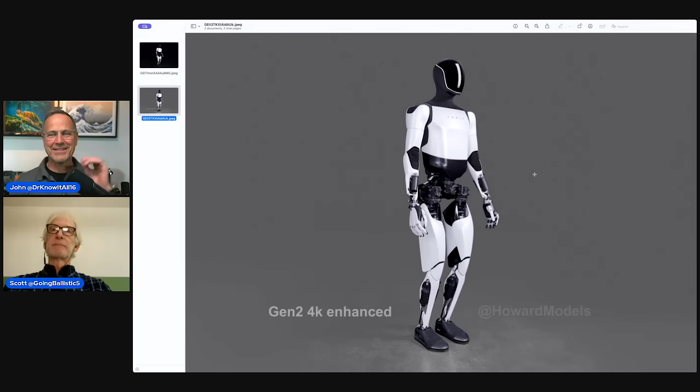So here is the original, but I think we actually want to look at Ed's, right? It gives much better contrast. Because you have like a kind of black on black, which is really hard to see, and he did a great job of enhancing. As I tried it, all my attempts were kind of lame at first. This one here, you really can see the edges of the bot a little bit better, things kind of pop out.

I'm thinking about that classic '90s thing: zoom and enhance, zoom and enhance. So we've got the enhance, let's try the zoom. You want to start at the top and work your way down, go from head to toe? Here we go, so here's the head, and I'll make it nice and big. That's about as big as I can go without overtaxing the screen.

Interestingly enough, we've actually seen more about Figure's face than we have about Tesla bots, because we've seen it do that little funky startup look or whatever that is. Figure does that, but it doesn't appear there's any sort of output display on here that we're aware of.

The two changes in the Gen 2: in the original one, the head did not move. In Gen 2, the head's able to move, it's able to nod up and down, it's able to turn left and right. So it has 2 degrees of freedom, they added 2 more actuators there. By my calculation, they probably added about an extra kilogram by adding those in. So for the 10 kilograms they lost, they added one back in right there.

So it means they really got rid of 11 kilograms in a way somewhere else. But as far as we know, there is no information displayed on the face. Doesn't mean it won't eventually, but you do have that nice crisp outline that goes around there.

James Douma has an interesting theory about that, because the question all along was, does the head really need to move? It doesn't seem like it needs to move. He thinks the only reason they put it in there is more or less for social integration, to make it a lot easier to communicate to the humans where it's looking, because we're just kind of used to that as a species, that we can read people's eyes and head movement very well.

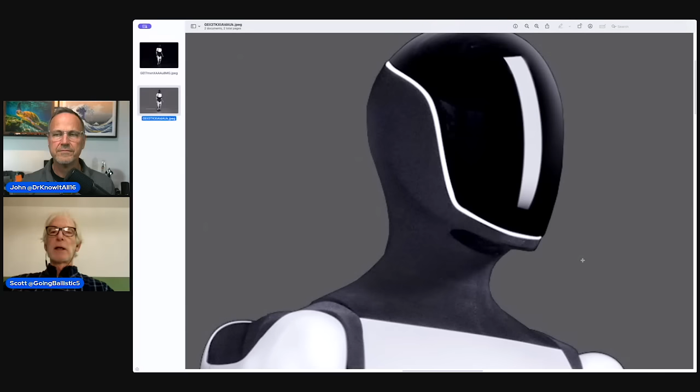Unfortunately, it doesn't tell us enough information about how that mechanism works. I suspect it's just two stacked actuators together. James had some theories that it could be like a ball and socket, where you could have these linear actuators to move it around, like C3PO's head. But I think that might be almost over-engineering.

It might be easier to stack them together because my theory has been that the roll of the wrist - when you look at that motor that's there, it only shows up in one place on the bot, and all the others have multiple purposes. And that's because it's such a low torque one. It seemed to me it was originally designed to also be able to do the neck, because the original design had the neck in there, and then they got rid of it.

So I'm saying, going off the original design, I think they decided to put it back in there. They're probably using the original design of two actuators - one to do this, and one to do the neck.

Yeah, and potentially even - because if the head doesn't really have an awful lot of stuff aside from sensors in it, it wouldn't be that much weight, so it might be able to get away with just a really small actuator. And it could be they came up with even another actuator for that, that is really low torque.

Well, it's a low torque one, still has to do a little bit if you're carrying a load versus what's there. So we'll see. But if they're using that one, that's why I'd guess, because those were about half a kilogram, the size of those actuators. And assuming they've stripped it down a little bit, maybe it's a little bit less than half a kilogram. But by the time you put it on there, you've added about a kilogram.

But at the same time, they had some structure there before to hold the neck together that's now been replaced with something else. So I'm not sure what the trade-off is. I'm guessing about a kilogram was added.

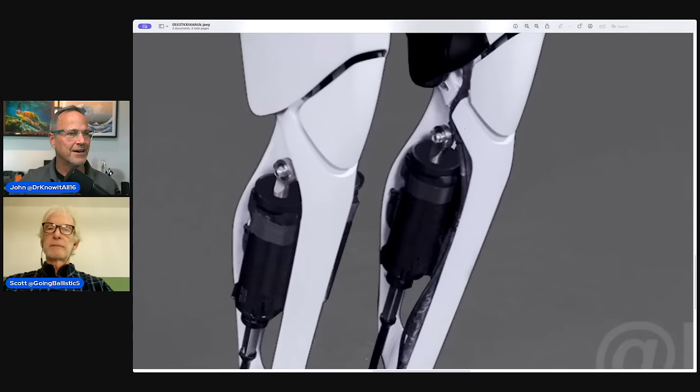You have a kind of roll axis on the lower arm as well as in the upper arm, and you can see where the two parts come together, and there's very little gap about there. So I kind of joke that there's no panel gaps - no one will be able to complain about that.

It seems really well engineered, really well finished when you kind of look at how well everything fits together in many different places.

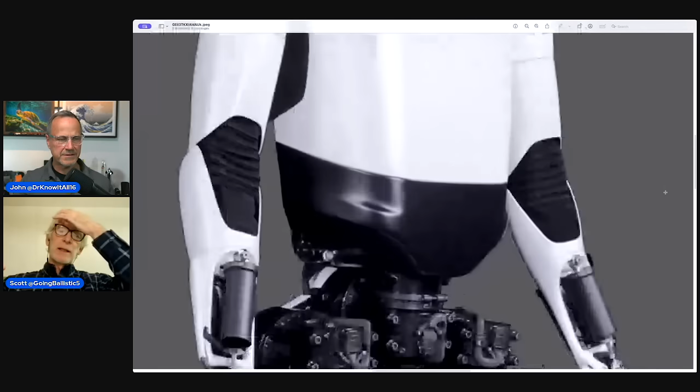Now, one thing I want to rely on your aesthetic eye for - when you zoom back and look at the whole bot holistically, do all the colors and everything match? Does it look like all the white elements are made out of the same material, or do you get the impression they might be slightly different materials? Is the color off a little bit on where you think the structural members are versus the covers?

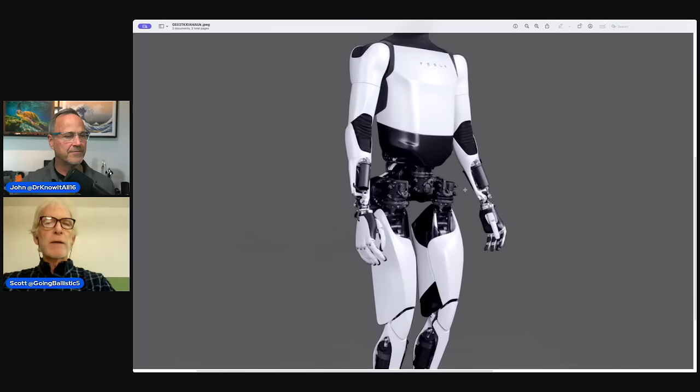The place that I would imagine, because clearly I think most of the rest of this is all cover, but the one place I noticed that has to be structural is the calf area and the lower arm. If you look at the wrist area, yeah, this area too. So those two are there, and when I looked at it really close, the color match is pretty darn good, but I get the feeling that they're slightly different materials. I don't know if it's just the lighting, the fact they're angled a little bit differently, but my gut tells me it's not the same material. They've done an exemplary job trying to get them to match.

I talked to my daughter, who is like the additive manufacturing expert in the family. Good to have one of those around.

The first impression is, do the covers look like they are 3D printed, or could they be injection molded or something like that? The overall impression was that you can't really see any indications that it's 3D printed, because usually there's some sort of pattern or something you would notice. But again, this is only a 4K image; it's not really high resolution.

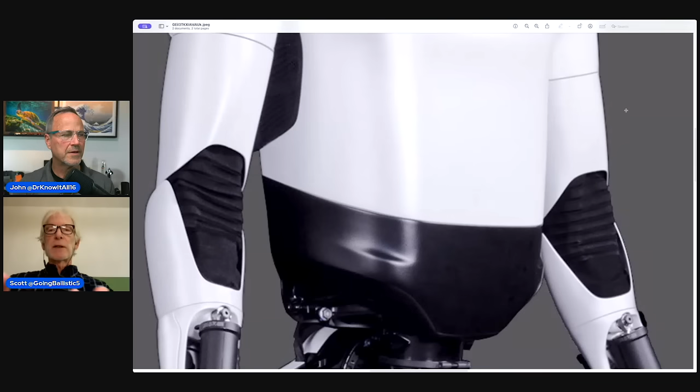Well, with a certain amount of post processing, you could also polish things and you wouldn't know. So straight out of a printer, you'd be able to tell, but there's probably been some post processing if it has been 3D printed. Even if it's been injection molding, there might be a little bit of post processing done to get rid of the flashing and everything else, because a lot of times you would be able to see that. So it's really hard to tell what material is there, or anything else, but it really looks good. There's no doubt about it.

While we're talking about materials, if you look at the difference between the white part and the black part here, the black part I would guess is some sort of aluminum or something, because it looks like it's powder coated. You can see a little bit of rippling on the surface where the specular highlights are, that seem to indicate that's more of a metallic thing that's been powder coated, and it's not absolutely perfectly smooth. Whereas the top part, it just might be a trick of the light and the fact that it's white, but it looks more like plastic on the top part. So that would be my guess.

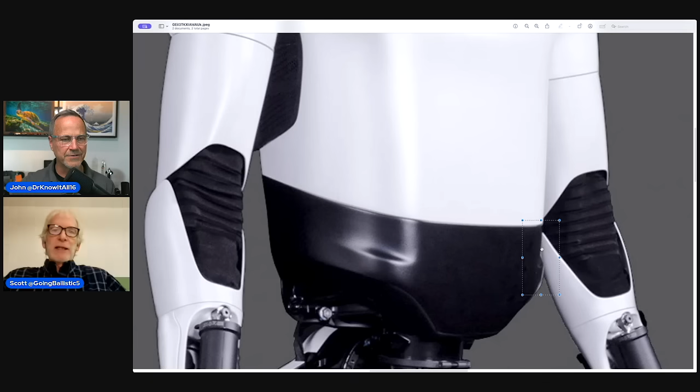So on the lower black part, you could see that kind of glossy white area in there, indicating there's a little bit of a notch or dimple in there. At first I was trying to understand what that is because I was expecting it to be a very smooth surface. But when you look at the video, you notice in that lower section there, it's got these dimples on both sides, and you can see it here too. It has something to do with the structure or whatever is underneath - that's the reason for them to do that.

And unfortunately, the waist area, because everything is so black and so dark, it's really, really hard to be able to make out too much of what's going on there. We'll try our best as we go along.

But again, if you look at the lower arm, if we kind of just zoom in on that area first as we go down the arm - I want to touch on this too. My theory here is that you need some sort of an anchor point for these actuators to mount to and grip onto, to move the upper body, which is pretty large and massive overall because it's got the batteries and all the computers. So I would imagine they've built something structurally into it that's essentially just a little handle for it to grab and hold onto as it's turning.

So underneath there's a structure where the actuator that's going to make the torso spin, or rotate along the spine - because you've got one that makes it go left and right, and the one that allows it to rotate - that's the main actuator that is then being bolted directly onto that. So that is where the torso structure is going to be, and then of course in there you've got that cavity that's going to be filled primarily with batteries. At this point, we think it's still 2170s because that's what it was in Gen 1, but the cavity looks to be a little bit bigger. So who knows - either they're putting more batteries in there or they could have changed the style of battery.

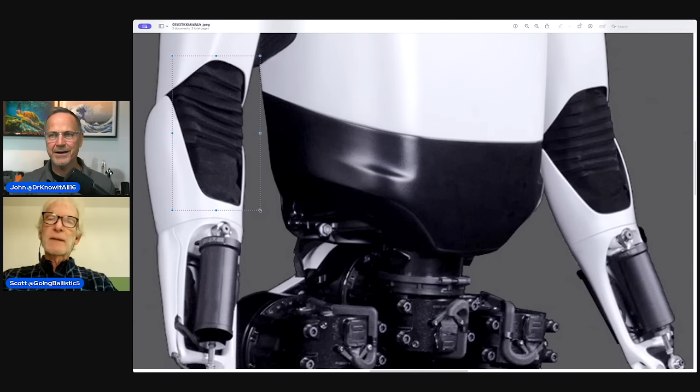Show this - it's extended down the arm much further than you would have expected. Yes, because there doesn't seem like there's any mechanism there.

So when I was looking at the elbow before, at first I thought, wait a minute, does the drive mechanism at the elbow kind of go through there? And when I reviewed it, no, it's actually in the back of the elbow. The part that kind of pokes out is in the back, and that's where the lever arm and everything comes down. So you'd expect it, and there is some protection in the back, and there is also probably some sort of black cover.

We can't see it in this photograph, unfortunately, but the pleated section there is much bigger and far more open, and I'm not sure why. The only explanation might be perhaps some of the cabling is coming through there.

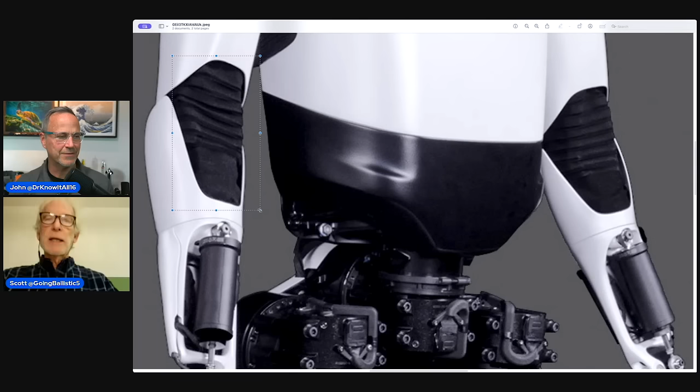The one thing we didn't look at, because we couldn't see it up on the shoulder, you don't see any of the cabling or harnessing or anything. It's really so tight, little cabling visible. It's beautiful, like they've fit most of it. You really have to go out of your way to kind of find it, and it's not until we get down to the wrist that the cables start to expose themselves. The first real cable you can see is right there, at that area.

Now, the thing we got to remember, what's going on that lower arm is you do have the wrist roll, which is going to be not quite plus or minus 180, but a substantial amount of movement, which means the cable that you're having through there is going to have to deal with the fact that it's going back and forth quite a bit. So you're going to have some excess cable it's going to have to wrap and kind of unwrap, and that might be the reason - they just don't want it to be constrained in there, so they have that open fabric area just to take the tension off the cable.

It may be as simple an explanation as that. It could also be that you reduce a little bit of mass, but then again, those are plastic covers, so I don't think there's a whole lot of mass there in the first place.

Someone else has said it could also possibly be to make sure you can get rid of any excess heat, because there are some servos up there. They're going to be generating some heat, so you might want to have a little bit of airflow or something like that. So there are many reasons, obviously, for doing that.

Those are just my guesses. But then when you get to that lower arm, that's where I think the material must be some sort of very strong, I would assume, metallic material, because you've got some loading going on there. You have the servos that have to be mounted - could you come up with a plastic of some sort? You could clearly 3D print that because it's a rather intricate shape, but you've got a couple of places that you have to pin the servos on there, and those are going to be places where you're going to have a lot of repetitive stress over time.

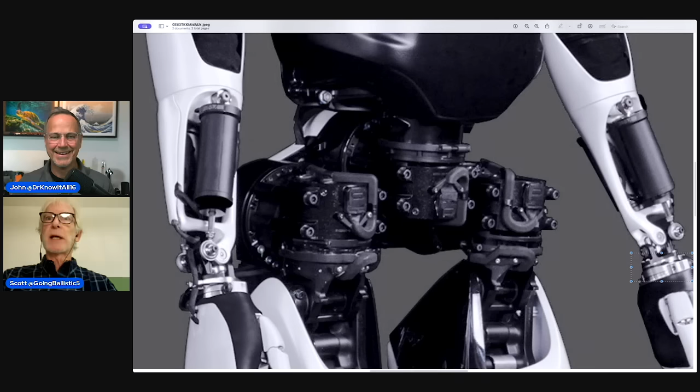Maybe it's just an aesthetic thing, it blends. It would look weird to have it go from white to suddenly metallic silver. But to me that sounds like an optimization - at this point are you really caring about the polish this thing has? This whole design, everything here is so polished, it feels very done, like they're ready for production versus something else. Or maybe they just wanted to see what it's going to look like, and I'm reading too much into it.

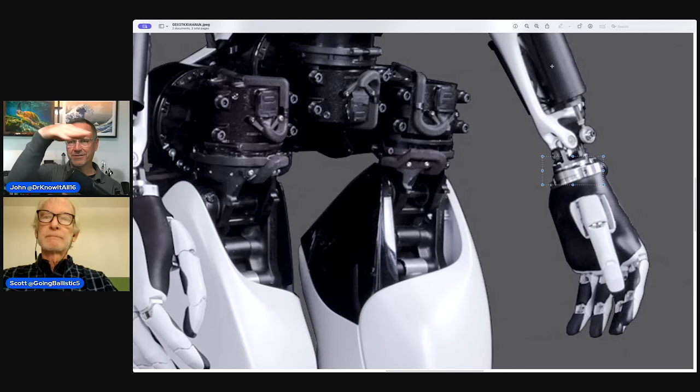So while we're talking about this, clearly we have two linear actuators on the side that allow the wrist to go up and down and also yaw back and forth. And then the wrist itself looks like it's got the rotational capability built in somewhere around here.

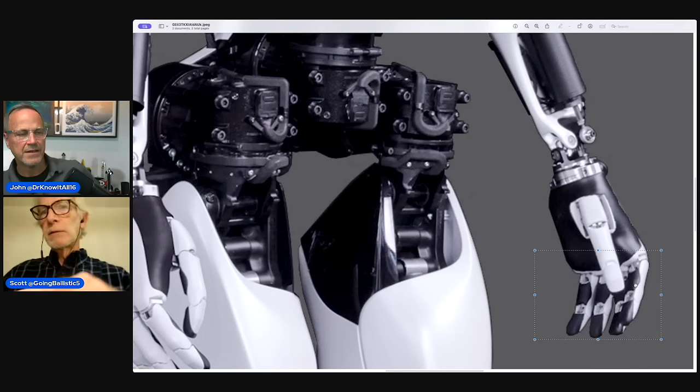And then of course we've got the fingers. As opposed to figure one that has three joints in the fingers, this clearly has two. It's got the finger pads, and then the knuckles - if you go to the left side, what would be the right hand, you can see the knuckles a little better. You can see the fingers only have two knuckles, and the knuckles where the fingers attach to the palm are offset. They're maintaining that offset to get a simulated arc of the fingers, because the fingers are all the same length - they're not making them different lengths because of different parts, different SKUs. So the best thing is to keep your part count down, make them all the same, but they mounted them a little different to get that arc.

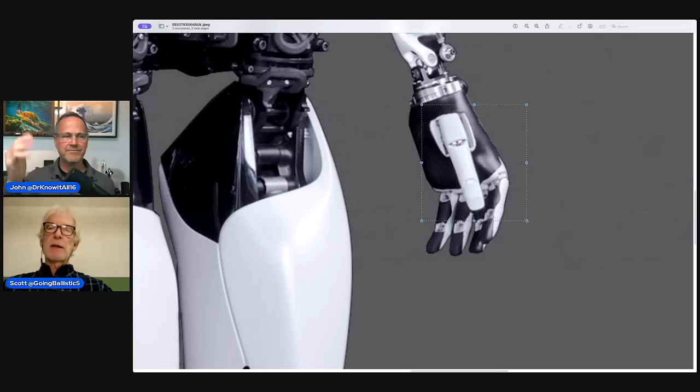A lot of people were wondering about the motion of the thumb, where there was a joint there. Yes, there is a joint, and the thumb is able to move in two directions - you can see that movement here, and movement up and down. It's designed to have two degrees of freedom there, whereas the fingers just have a single degree of freedom to clasp and open. But the thumb needs to be able to make that movement, otherwise they wouldn't have been able to pick up that egg. Maybe even the same thing with a t-shirt - that's the kind of dexterity you get from the thumb. And really, that's what separates us from other animals, the fact that we have an opposing thumb.

Just a small note from my animation background - they've got the resting position with the fingers slightly closed, which is much more natural. If it was looking perfectly straight, it would look like a robot. The fact that it has relaxed hands, not perfectly straight up, makes it look more natural as it's resting. So it's pretty deep into the design process when they're considering these kinds of things.

And of course, don't forget that we also have pressure sensors in here, which we discussed in yesterday's video. If you go to the other hand, you can see those pressure sensors a little bit better, so we know they're on the tips.

We just don't know. We see some black areas on the middle of the fingers, and we just don't know if those are non-slip grip or if they are also their own set of pressure sensors.

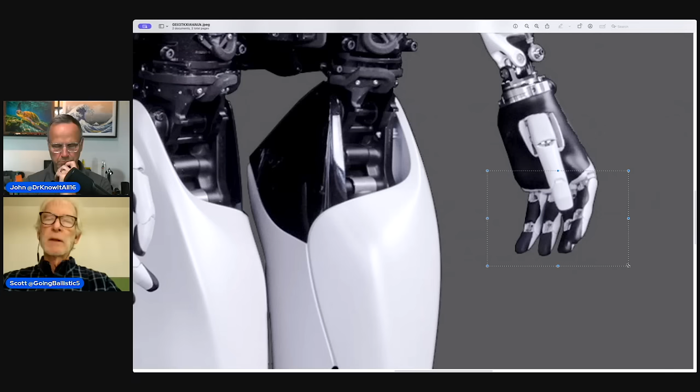The fact that they have sensors there means you'd need wiring to go along with them, through the fingers and out through the wrist. Looking at the wrist, the wiring going through there is very thin, whereas before it seemed very bulky. So they've done a very good job. It's still a little bit exposed, but it's not that bad, almost like it's not there.

This is where we can primarily see wiring in the body, coming out of the wrist, because routing it through the human wrist would be a complete disaster - it's just a whole bunch of little tiny bones. So in terms of design, it's better to route the cabling outside, although it's not the most aesthetic choice. Even the human body had to do that - we're jointed, and things have to go through there. You've got a really weird joint at the wrist, and of course your artery is exposed there too.

Normally arteries in the human body are deep internal, so if you get a cut you don't bleed to death. But there's only a few places the artery comes up to the surface, and one of them is around the wrist, because that's the only way nature's figured out to get the artery out to the hands - you just can't route it through the center. That's the same kind of problem here with the wiring. That's the best place to do it, because you won't kink it so much, and it won't get in the way since it's not right where the joint is.

In all robotic systems, figuring out how to route the wiring is a challenge. For end of arm tooling, a lot of it is just exposed. Paint robots have come up with a special hollow wrist that allows them to run the paint services and everything out to the gun internally, which is a remarkable design. But still, that wrist design has to be offset rather than having everything rotate around one place, because they don't want to kink the hoses going through there. You still have to make sure your radius of curvature isn't too small. It's always a challenge, and it's not bad what they've been able to come up with.

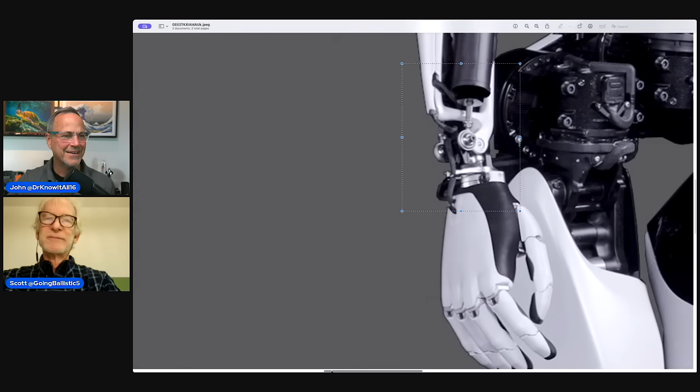But this, even though it's black, it's really cool how much we can see here. We have to thank Ed for that, because he was able to highlight it a little better so we can see that contrast. Before, I had no idea - it was like looking into the inky blackness and seeing absolutely nothing.

But the one thing we could see is these little guys - these look like standard Allen wrench bolts. It looks like it's nothing special right there. And it shouldn't be anything special, it should be something that's very easy to put together. So we can see how they're bolted together.

It's basically the same two motors just configured differently, two of them for the legs, and two of them are for the torso. Let me back off one little bit here.

So the torso, this is the one that's going to yaw it, I guess. There's going to be roll on the top, and there's going to be the bend back and forth. So we've got two different motions there.

Now the thing to point out is the torso in the Tesla bot is not able to lean forward. There's only 2 degrees of freedom there. The main movement is it can roll directly vertically along the spine, and it can go back and forth a little bit left and right. It cannot lean forward.

The leaning forward is actually done through the hips, through an axis that's much lower, below the pelvis, where the hip joint is, doing what I think is called flexion, like when you're kicking your leg. It comes there because it's a redundancy, you don't really need it.

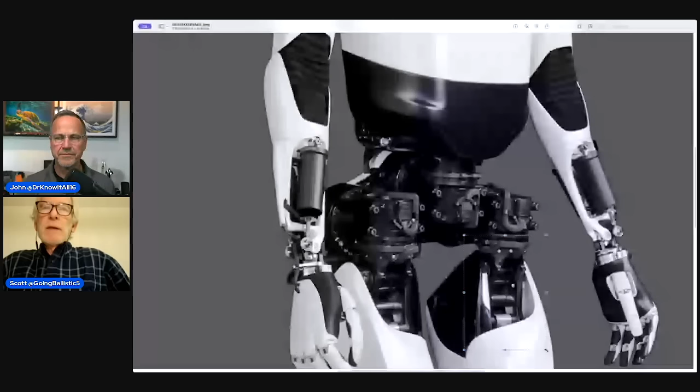Now the Figure bot, they came up with a really interesting design for the torso where they have 3 degrees of freedom. So they are actually able to lean forward through the torso, giving them a bit more redundancy, which means it might be easier for them to get in and out of a vehicle if they ever needed to. It's just a slight difference there.

But the main reason the Tesla bot doesn't do that is to reduce the actuator count, it's one less actuator. The other thing is you have that same pattern of two motors bolted together, and they want to do it in three places. In other words, they were reusing that pattern rather than coming up with yet another unique pattern somewhere. So that's kind of clever and nice about the design decision.

It's like, we don't really need to lean forward because we can accomplish it another way. You lose maybe a little bit of flexibility, like being able to access things if you wanted to literally sit in the Cybertruck.

But the big change we can see here from the Gen 1 is that the Gen 1 pelvic girdle had a plate in the front and in the back connected together. Now there's only the plate in the back. And that probably saves like a kilogram of material.

I think there's a big weight saving right there, as well as those servos look a lot more compact than they were to begin with. Way more compact.

Look at the pretty dressing of the cabling here. We've got these cables in sort of chaseways that you almost don't notice them. It looks like part of the design, but that's clearly the plug that plugs in, you can see where it goes. It's a beautiful cable design.

Whereas before there were a lot of wires around there. There were also some other control boxes sitting down that had blinking LEDs and everything. It looks like all that stuff they integrated together.

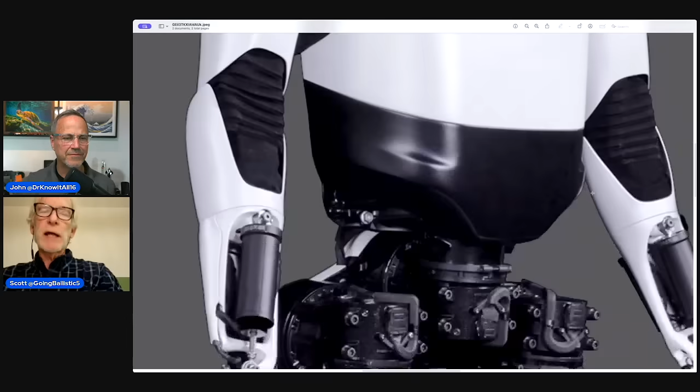That flopping means your body could decide it's acceptable to do that. Same with the knee - I don't need a rotary actuator there, I'll do it with a linear one because I only want the knee to go straight out and flex back at most 120 degrees.

Speaking of which, now we can see kind of like a knee pad or kneecap here. It's basically protecting what's going on there, and you can't quite see it, but it does open up when it moves.

This is also a little bit less human-friendly than the elbows, because we can see inside and you could imagine pinching your fingers. But this is probably fine for an industrial robot - it would not be fine for a domestic robot, but we're not talking about domestic robots yet.

So it can get away with that - you'll put something around it, like when you sprain your knee and get one of those ace bandages that kind of stretch over it. They could have socks and other stuff that would be able to go up there and cover and protect it, as well as maybe putting some material behind those knee pads for additional protection.

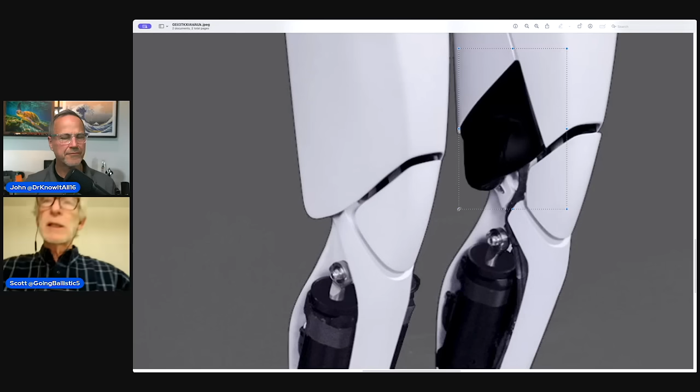Do you have an explanation for what this black part is? Is it just aesthetic, or what is that thing? It's kind of weird - it looks like some sort of potential cover going on down there, and it's only on the inside. It could be that they just want airflow, or because the cabling might be coming through there.

There's definitely cabling coming through - it's really hard to tell, but you can see the cabling coming up through here, more or less. So maybe it's flexible so that as the knee bends and the cabling comes in, it's able to flex a little and move out of the way so the cable doesn't get trapped. The length of the cable is going to change a little bit, but there's no rotation along those axes - it's really just the bend going on with the knee.

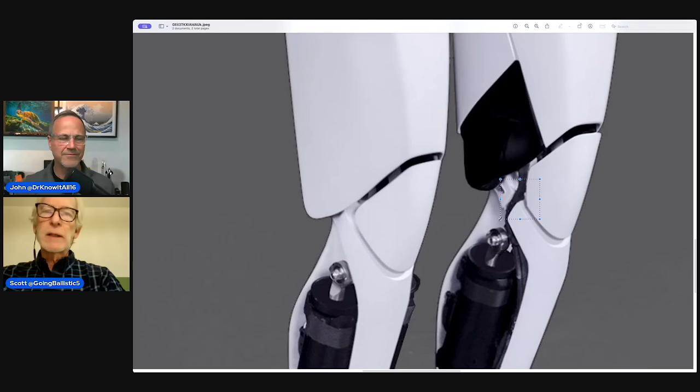Really very attractive what they've done here too - they've created a little channel for the cable to go through, and it goes through there, and it also separates out a little bit when it gets down to the foot. So if we bring it up there now, there's the ankle joint.

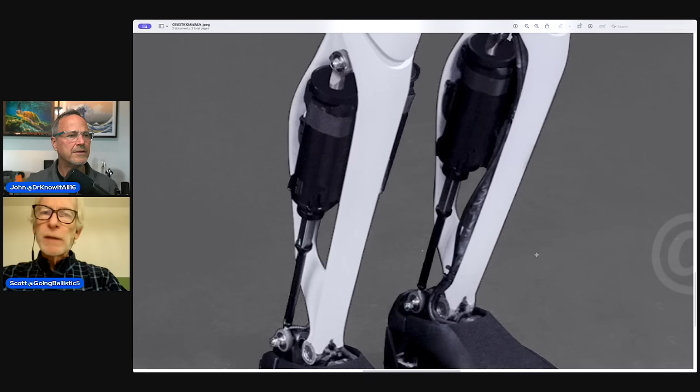If you zoom in on one of the feet, let's make sure we touch on this for anybody who doesn't know - this is very much the same as the wrist. We've got two of these linear actuators that can work in parallel or opposite each other to allow some degree of motion. This is the beauty that I've pointed out many times, but want to point out again - when it comes to the hand, you've got these three motions.

You've got the roll, which they have a dedicated motor for doing, that can almost give you 360 degrees of rotation. Then you've got this pitching motion of your hand, this flopping back and forth.

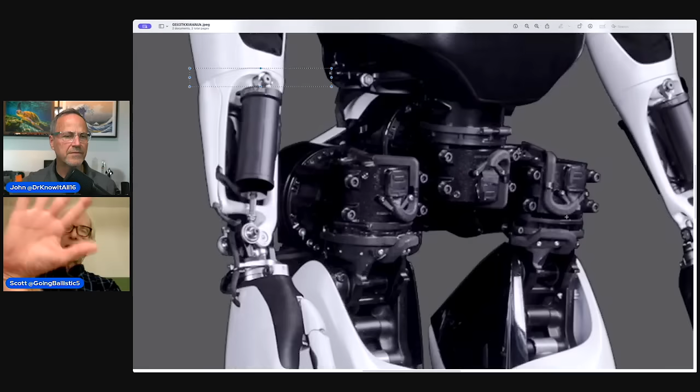Quite 180 degrees, but it's a very important motion. And then you get your yawing here, which is almost not there, but you have a little bit of movement to the left and to the right. You could decide to go ahead and put a motor on there, but that's a lot of overkill, and usually that's the last joint of movement.

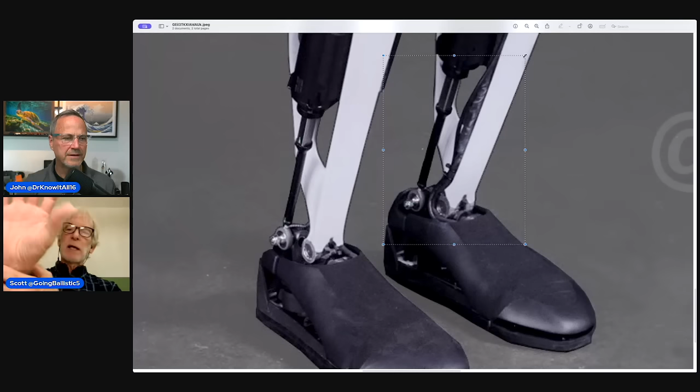So you have this servo that you have to put there to do that, which now has to be carried by the one doing this, which has to be carried by the one doing this. That means you kind of lose the advantage for this little bit of range of motion. By going with a parallel mechanism, you can come up with something where both move at the same time.

Your hand flops up and down. But if they go differentially, you can kind of get that. Mechanically, you can't do it by a whole lot — you might be able to do plus or minus 30 degrees, maybe plus or minus 45. But if you actually look at that mechanism, it has a lot of movement. It will allow movement this way, but you can't do too much off this way.

And that's okay, because that's exactly how the human hand works. So what that exactly means is that those two motors do not have to carry one another. They're separate. All they have to do is carry the hand, which is great.

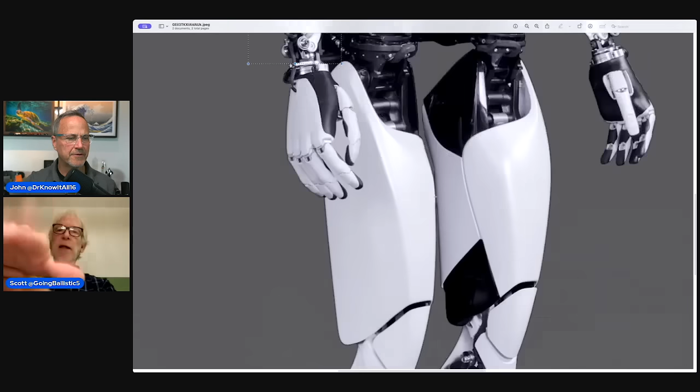The other thing is, if you add those two motors up, they have a lot of torque, especially when you go down to the ankle. So the ankle mechanism is the same thing. For the most part, our feet like to go back and forth like this — they don't like to turn back and forth. If you do a lot to the left or right on that, that's how you sprain your ankle.

If you step on something that's uneven, so we have a little bit of movement there, and the Tesla bot has a little bit of movement there that's also allowed. But the main movement is that it can do the toe-off kind of action there.

The calf muscles — the two of those motors added together — have almost the same torque as the actuators that are in the hip joints, moving the knee and moving the hip, just a little bit underneath that. So that means there is a lot of power there when you decide you just want to direct it to the toes, and then a little bit to the off side. That's the other advantage — you can decide you want all that torque for this one particular action, and you'll be able to get that in there.

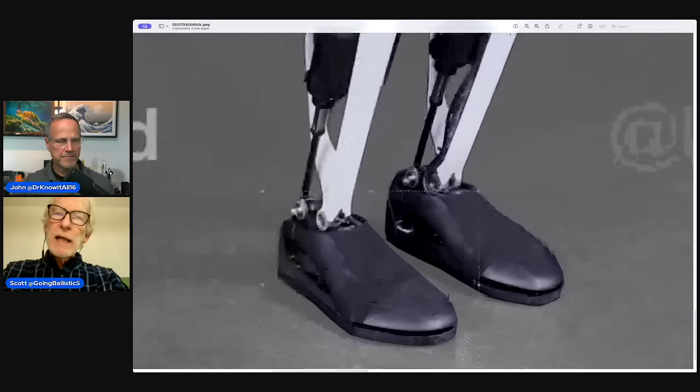Now this is when I was looking down by the foot, at what is the Tesla bot's right foot to our left. If you zoom in there, you can sort of see the very end of that shin bone when it comes down, and you can see the joint that's there, and you can see how it's silvery — you can see how the white kind of ends a little bit.

And for me, that was the clincher that it's coated metallic — probably coated aluminum. You can see that right there. I don't think it's like they tried to figure out how to bolt that plastic — if it was, let's say, a plastic cast piece or printed onto there, no, that's one solid thing. So it looks like they are coating it somehow, and you can see the exposed metal that's there.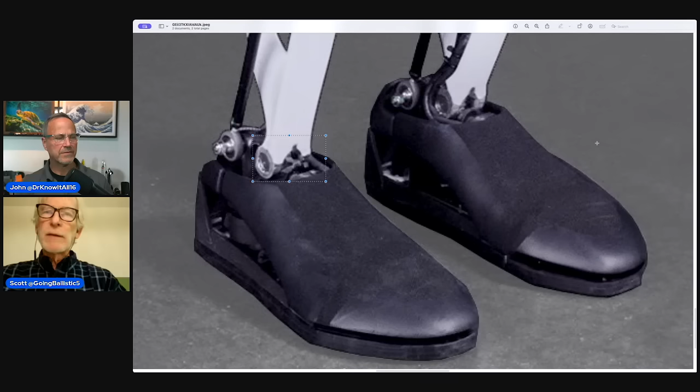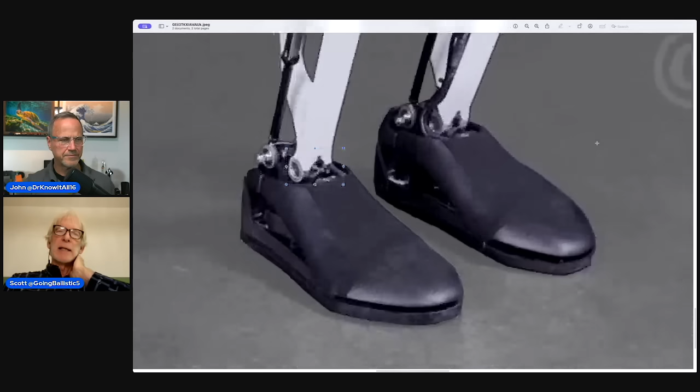Now, a lot of people ask, could they be using magnesium? They could be — I mean, because they lost a lot... magnesium would be one way to go. My feeling is that at this point, probably not. I don't know whether Tesla has the expertise to do magnesium. It may be that there's no expertise required to do normal machining or casting of magnesium — I'm not sure, but I'm assuming maybe it requires a little bit. Jordan, who has also been doing a deep dive into magnesium recently, as we know, he feels...

It would also be too early because you've got to get the magnesium supply chains and all these things up and running. It's not cost effective right now. You'd be able to get a little bit of weight savings, but again, it's too early - it's an optimization step. I'm pretty confident it's a type of aluminum that's just coated, not raw magnesium, even though I thought it had kind of a silver coloration to it.

The fact that this looks very silver, I could be wrong, and then of course there's alloys - it's not going to be pure magnesium. We know it's going to be some kind of alloy because the biggest thing everyone says about magnesium is, oh man, it just burns. It's the stuff you put in fireworks.

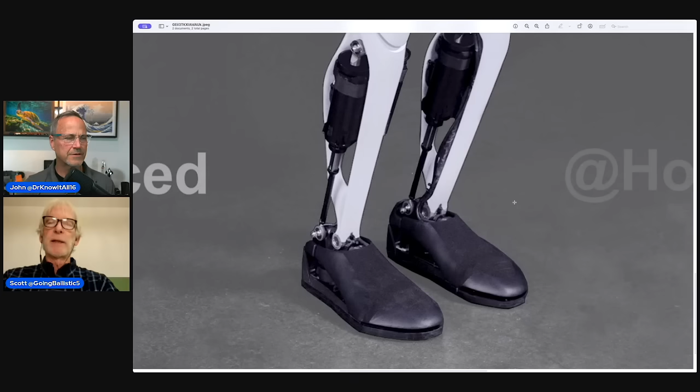But so what you do to actually work with magnesium is you just alloy it a little bit, and you don't have to worry about the flammability. I'll add one other thing to the metallicness, especially in the legs - these two joints produce just a little less torque than the hip joints, and they're supporting the entire body, but enough to lift a grand piano. So that's a lot of torque going through there, and in order for that thing to hold that much torque, there's no way that's plastic - it would shatter.

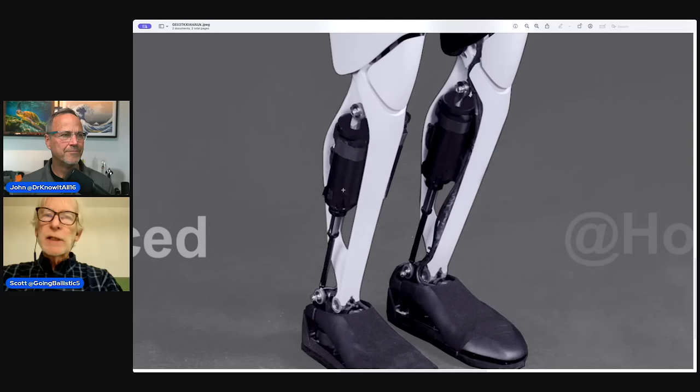Now we can't see too much detail in the feet, but we know from the video that the toe box has some flexibility. If you look closely, you might be able to see where the flex point is, towards the front of the toe box. You can kind of see where it might be a little worn, like across this area, and across this one - it just looks like a shoe that's been worn for a while.

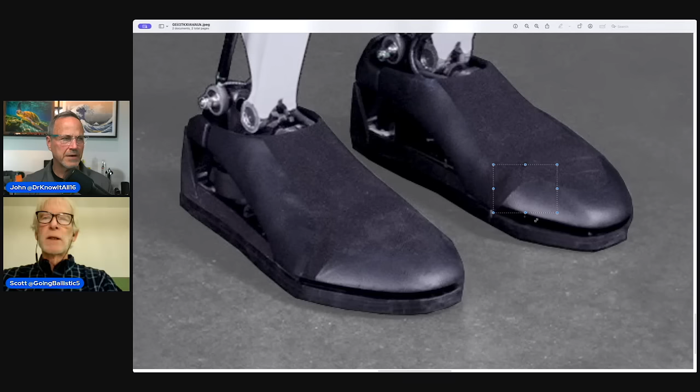It's a degree of freedom in there, but it is not an actuated degree of freedom. So probably what that just means is a torsion bar that's pulling it back to straight, some kind of spring mechanism making sure it flattens out. So it goes up on the toe, bends a little bit, and then gives that energy back - articulated but not actuated.

So there we go, we've gone head to toe on this guy. Let's zoom back out again. He's very attractive. I think what we're both noticing from looking at this amount of detail is that this seems like Tesla is starting to optimize the design here.

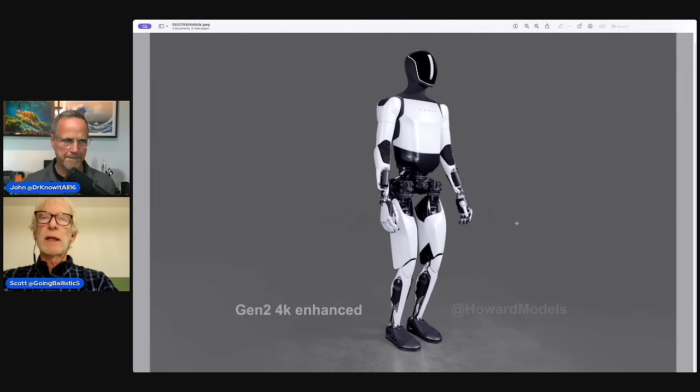It's no longer just getting stuff off the shelf and slapping it together. It's like, what is this thing going to look like when we make a million of them? It doesn't look rough, and the Tesla logo is on there already, which seems like you're getting close to a finished product when you decide to put the branding on it. But even forgetting the logo, just looking at how polished the whole thing is, how well everything fits together, the aesthetics of it, seems like they must be getting close to thinking they really want to start building a lot of these things.

But again, they're not building them to sell, as far as I know - they're building them just for internal use. But still, a first step.

Just look at this particular spot, this joint - clearly there's two halves of a clamshell they're putting together, but that's a perfectly straight line with no panel gaps, and around this direction too, as the roll joint fits with the other joints. Any place you look, it's very, very refined - the quality is really good. It seems like, wait a minute, you're almost getting down to step 5 in the algorithm.

Very interesting - who knows how many iterations they went through. The other interesting thing was when we watched the folding of the clothes, we saw most of the other Optimus bots in that lab were Gen 1. Where are the Gen 2s? I was expecting to see a plethora of Gen 2s, but they were all pretty much Gen 1s. As far as we know there's only 2 Gen 2s, since we've only ever seen 2 of them together. So looking at this, is that just a one-off where they went in and artistically got everything perfect, or are they set up to start producing these components to create a pretty large set of them?

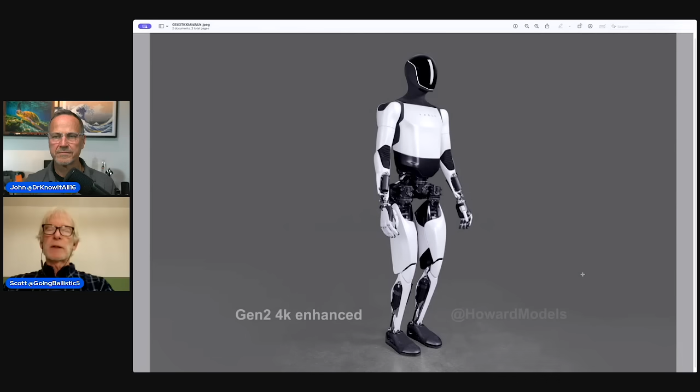We've been talking to a lot of different experts to get an idea of what number of bots you'd need. In the early training sets, it felt like a certain amount could be done just with simulation, but you can only go so far. James has said this too - the physics in your simulation is only so good. Real world physics is messier, and in order to tune everything you've got to start collecting that data in the real world. So you can do so much with teleoperation and simulation, but at some point you've got to get the bots out there interacting to see a lot more. That's why the expectation is you'd need a reasonable number of bots - whether that's dozens, hundreds, or thousands is a point of contention right now.

We don't know exactly. Did Sawyer say exactly where this photo was leaked? I don't know if it was leaked - I think he said they released it, and he seems to know where to go on their websites to find it. Maybe it was actually on the Tesla bot X account and we just didn't bother to go check.

The reason I'm throwing this out is because we got a big announcement from Figure recently, a lot of press going their way. So it feels like Tesla, which used to wait until major events to announce big updates, is now being a lot more aggressive about micro releases - it's like, hey, it's folding a shirt, here's a high resolution picture. They want to keep this in the public eye and not let people forget about it.